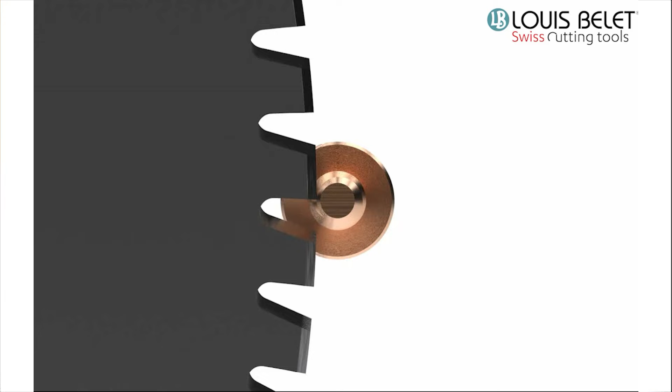Let's start with the presentation of this product. It's a circular product that you see, a polygon tool that directly cuts the thread on a screw on a shaft, and it will save you seconds. So how does it work? That's what we will see now with this animation.

Let me share my screen. There we go. You have the screw and you have the cutter. Standard at Louis Bélet, we have a cutter at 40 or 45 millimeters, this guy here. It's quite simple because the speed of the cutter is the same as the part. You synchronize the two, and you get rotation, taking into account that the cutting speed of the cutter is 50 meters per minute. It went a bit fast.

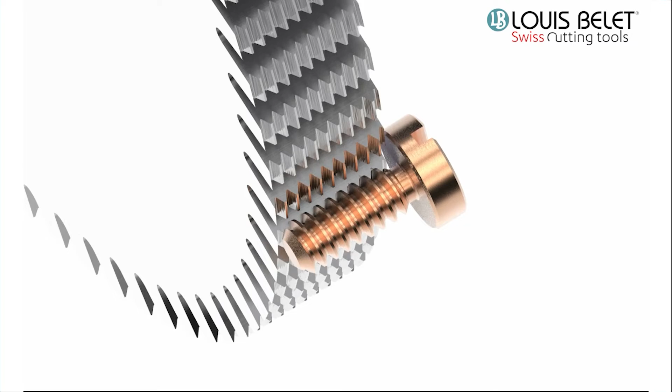You do the thread at once, directly going into the material. Let me replay the video. So you have the cutter, you have the part. Here we do have an M1 thread, with the same rotation sense and same rotation speed between the part and the cutter.

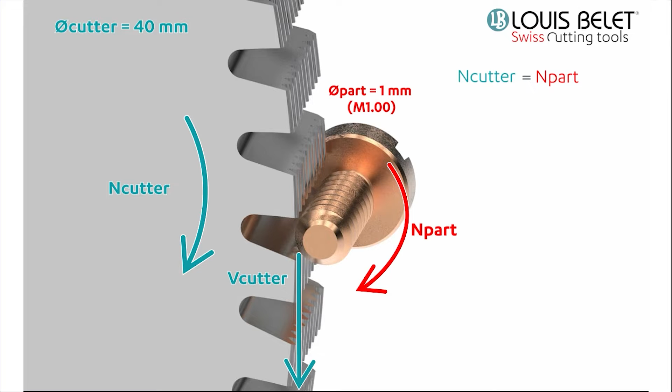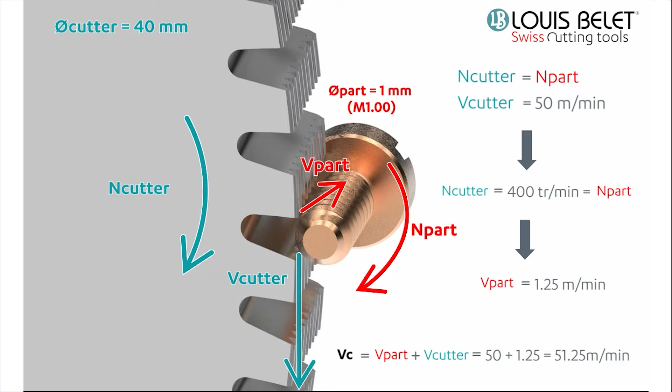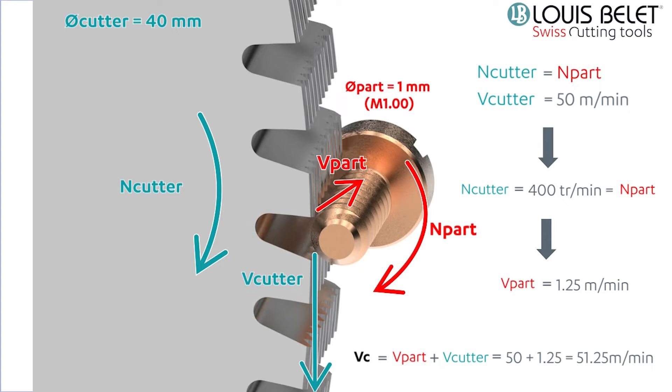The speed of the cutter is 50 meters per minute, as I said, and by definition the rotation speed of the cutter is then 400 RPM, and the speed of the part is 1.25. The total cutting speed is the addition between the cutter and the screw, so you have 51.25, which is the cutting speed at the end. Of course, this cutting speed varies based on the material you cut. You have all the information in our specification sheet.

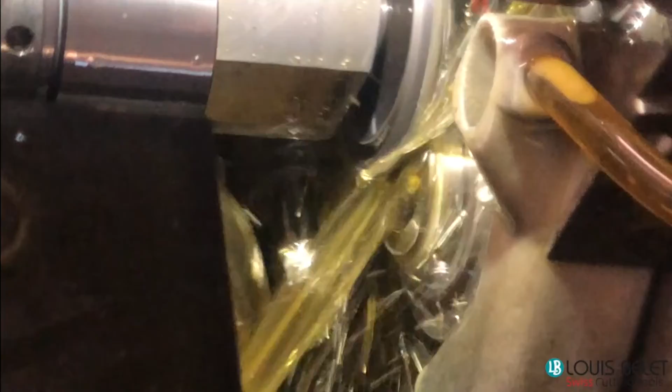Here you see an example of the part which is produced. We made that video at one of our Swiss customers who makes screws by the million. Let me replay the video once again. It's made on a Tornos Swiss Nano machine, and you see that the cutter enters into the shaft and makes the complete thread within a second.

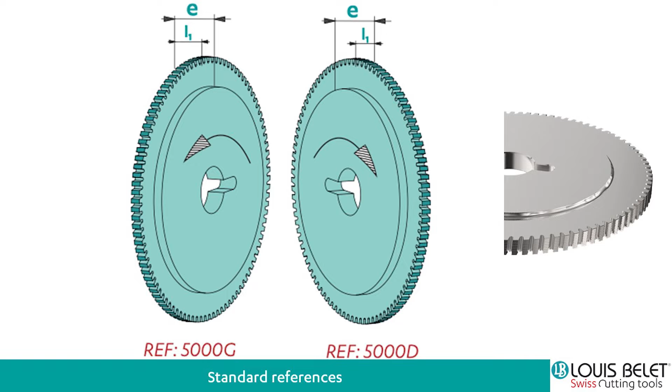As standard, at Louis Bélet we have left and right hand side cutters, with shoulders or not, depending on whether you come at the head of the screw or behind the head of the screw. You can get it with a thread step from 0.4 to 1.5, if I'm not mistaken, and the reference series is 5,000. It can be right hand side or left hand side, and you can see here that there is no shoulder on this one, so you can choose if you need a shoulder or not.

Before going further, let me open the first poll, asking you in which domain you are using the thread parts you are producing. As an example, the customer where we shot the video was making parts mostly for the watch industry, but they also make some small screws for the medical or dental industry.

As said, you can have various information on this 5000 series standard, but at Louis Bélet we are keen on innovation. Let me share my screen once again. Thank you for the vote.

Sometimes in the machine you do not have the room for a 40 or 45 diameter cutter, so sometimes we have to reduce the diameter down to 20, maybe 15. That means you will have fewer teeth on the cutter, and with a smaller diameter and fewer teeth, it may lead to a not so nice surface finish on the part, and you might get vibration.

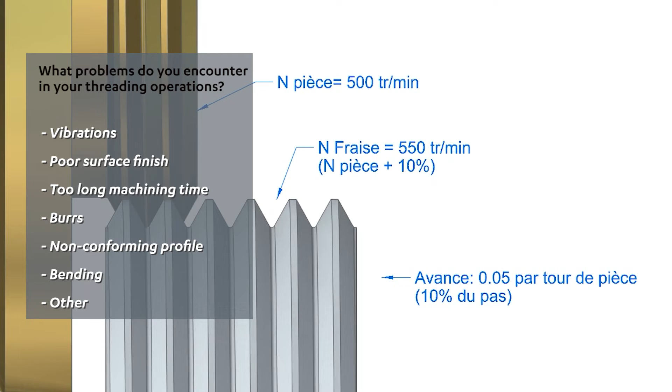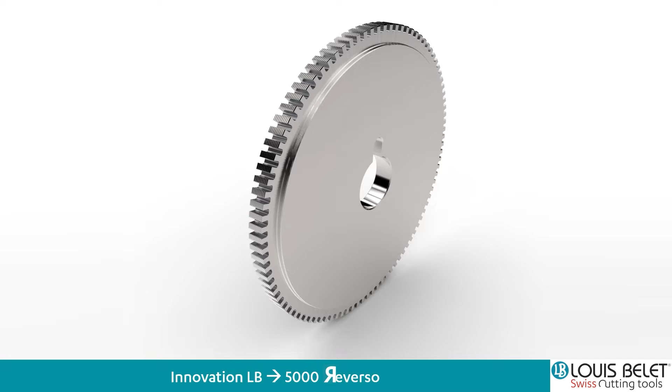While you answer this, I'll also introduce the second innovation that we have at Louis Bélet, and this one is what we call the Reverso. The Reverso cutter is interesting because it allows you to have double the life of the cutter. Why is that? Usually on a standard polygon cutter, the teeth are only on one side, so it's ground on one side, and then you have clearance in the back.

What we did here is a bit different: we ground the two sides of the cutter. This allows you to have better life duration, as I said. Once one side is worn out, you just turn it and put it back onto your live tool, a polygon live tool, so that you can directly start again.

We also improved the geometry of the teeth, leading to a much better surface finish compared to the standard 5000 series. So the 5000 Reverso, as we call it, improves, one, the life duration, and two, the surface finish, by avoiding the vibration of the teeth inside the thread.

We tested that at the customer that you saw before, and by using it, we heard a lot less noise or whistling of the cutter while entering into the part. So it's always a good sign when you do not hear the cutter going into the material.

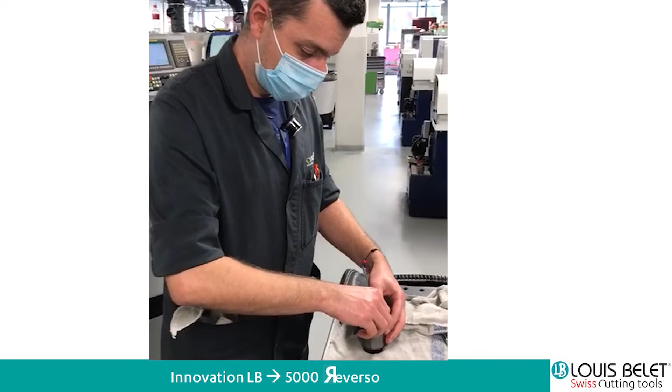To illustrate this, I'll show you a small video from the operator at our customer. He's just inverting the side of the cutter and putting it back onto the device, the live tool, and he'll put that back onto the machine. So as simple as that.

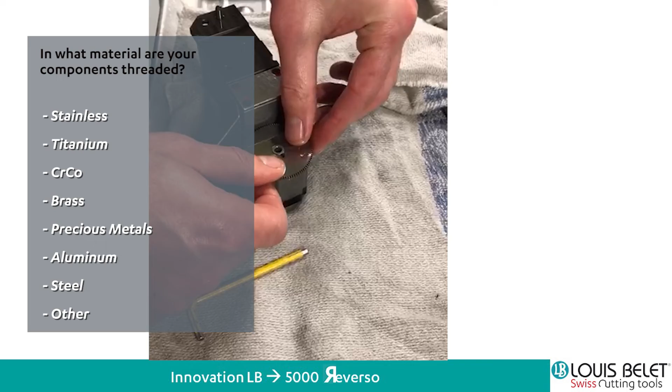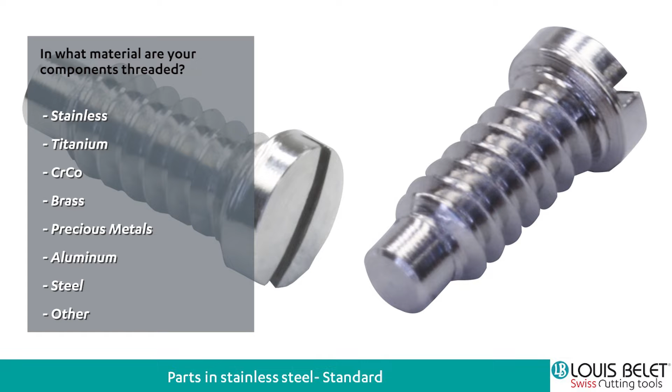This leads to the third poll of this webinar, and it's all about the material, because we will shortly see the results of the screws our customer could produce. They mainly machine two or three materials: stainless, titanium, and brass, and I will show you some pictures taken after the production of these screws.

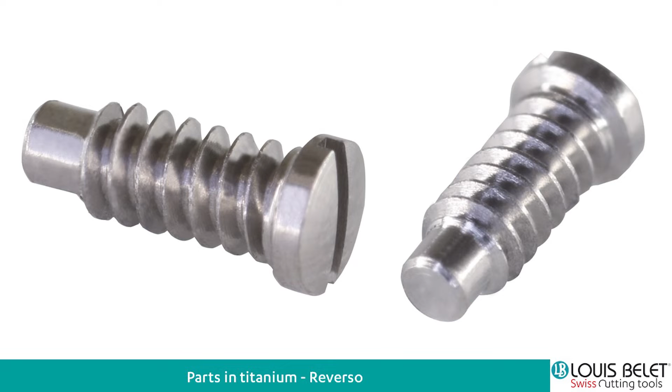The same screw, but with another material, titanium. They used to have some problems and issues with the standard 5000 series regarding vibration and the quality of the edge and surface quality with titanium, and they were really surprised that the Reverso gave such a good result.

Okay, so let me now try to share my screen and show you a real screw, because it's kind of difficult to imagine how small this screw is. The screw was an M1. So you do see here on my screen the screw, and it's a ruler in millimeters.

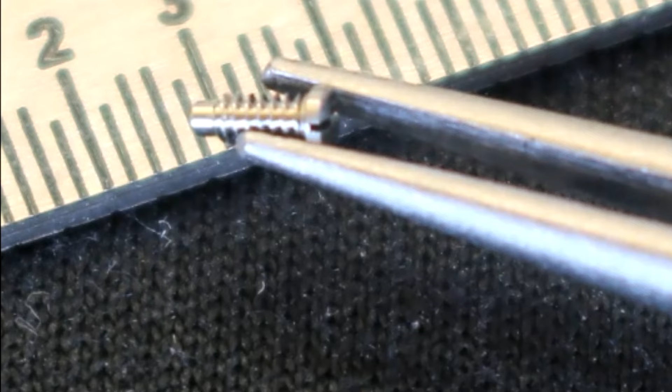I could also put in inch or imperial measurement. So you see it's pretty tiny, it's an M1 screw. There we go. So you see it was made with a reverso cutter, and the material is titanium. You really see the beauty of the part.

Really tiny, perfect shape, and a really interesting way of producing this screw. We will see also afterwards with the different questions, I'm sure there will be one about the speed. Yeah, this is really impressive in terms of surface quality, time of production, and so on.

I will try to get back to the polls and give you feedback on what you gave us as an answer. So, in what type of domain are you using your thread? Most of it is medical or dental, then micromechanics and automotive, aerospace, aviation, connectors, and watch industry.

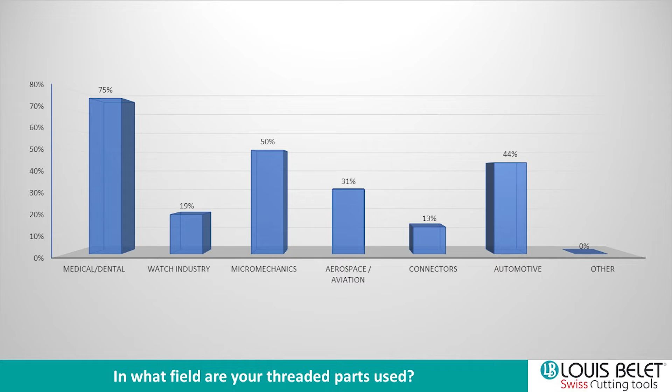What is also a side effect with this is my colleague, who was doing some production as well, had sometimes issues with night production, the night shift. The production was running, and there was not always an operator during the night shifts. Sometimes when he came back in the morning to see the production, the insert had teeth that were broken, and then all the production is lost.

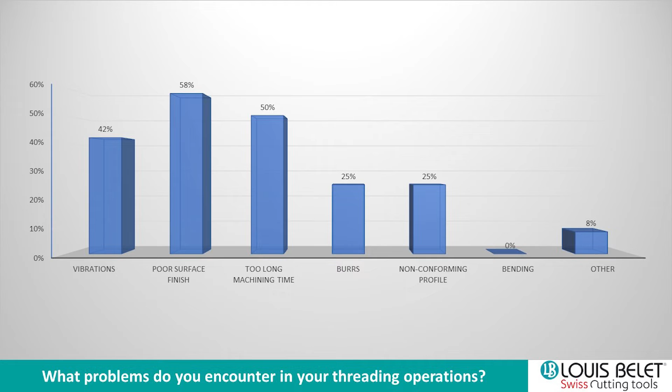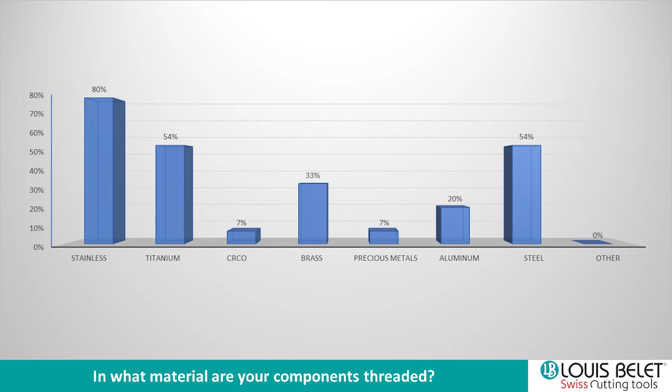Thank you very much for answering these polls, and let's open the questions. What is the quality of the thread? As said, this cutter has high quality, and you cannot miss or have a wrong thread. If the shape is on the cutter, you have the shape on the screws. That means the quality is as good as an insert, or even better with the reverso, according to our customers.

What is the advantage of the Polygon threading in terms of time cycle? Once again, as I said before, with the insert you might do it within 15 to 20 seconds. With a Polygon thread tool, you are down to 3-4 seconds.

And do you produce also on-demand shapes or dimensions? The answer is yes. We do have standard dimensions with a standard metric thread mainly, but we can do any shapes, also non-symmetric, also with a bigger thread. We even did a 0.1 inch thread for a connector, because these threads are used in the medical industry and the watch industry, here in Switzerland at least.